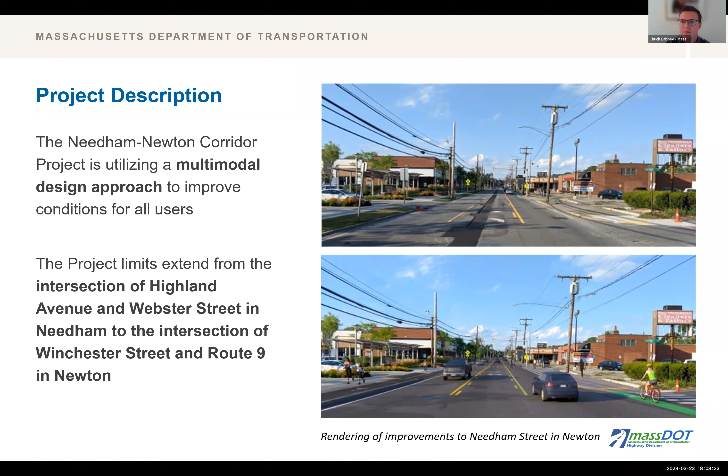Our project goals and benefits: first goal is to improve pedestrian accommodations by providing continuous designated sidewalks and designated crosswalks. Second goal, to provide bicycle accommodations by providing a 5-foot wide raised bike lane with shared use path connections.

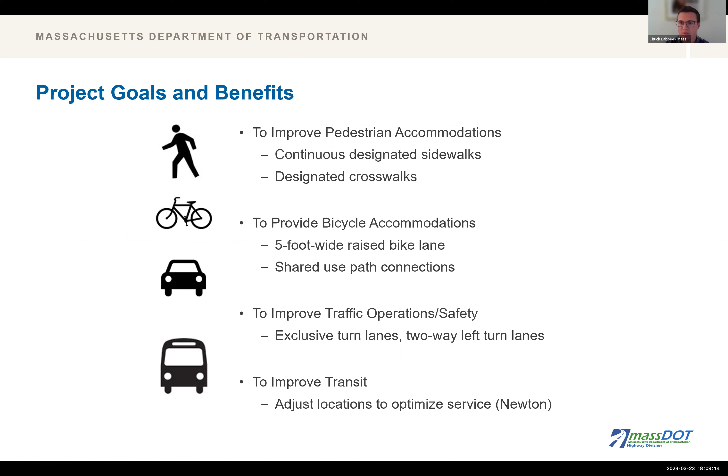Third goal, to improve traffic operations and safety by adding and expanding exclusive turn lanes and two-way left turn lanes. Our fourth goal was to improve transit by adjusting the locations to optimize service.

And now I'd like to introduce Mike Smith from P. Gioioso and Sons, the project contractor, who will discuss how the project will impact road users.

Thanks, Chuck. So as Chuck mentioned, my name is Mike Smith. I'm the project manager for P. Gioioso and Sons. We're the general contractor for this project, and I'm going to run you through all the construction to date and how it all affects everybody.

So our typical work shift is Monday through Friday, 7 a.m. to 3:30 p.m. each day. We do not have lane closures during peak traffic hours, which are 6 a.m. to 9 a.m. and 3 p.m. to 7 p.m. When necessary, night work is typically performed from 9 p.m. to 5 a.m. Sunday through Thursday.

Additional night work for milling, paving operations, and bridge reconstruction will be necessary. Two weeks advance notice will be provided before this work begins. The night work is necessary to lessen the roadway impacts during peak traffic hours. Driveway, pedestrian, and bicycle access will be maintained at all times.

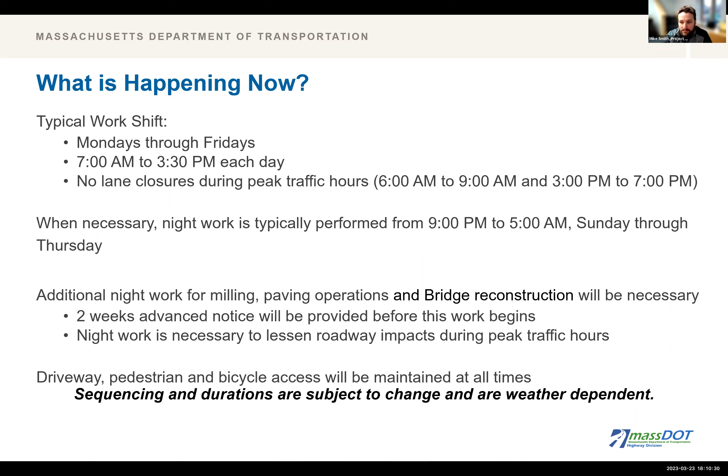Next slide. So the construction progress to date. Next slide.

For utility work, the utility companies continue with the utility relocations, including conduits and poles. 60% of all the overhead and underground utility relocations have been completed to date. The water main requested by the city of Newton is now complete, which included 5,300 feet of 20-inch water main and services. The drainage work throughout the entire corridor is now 100% complete. In the roadway, 5 retaining walls that were necessary to complete the project have been installed, which is about 70% of all the retaining walls for the project.

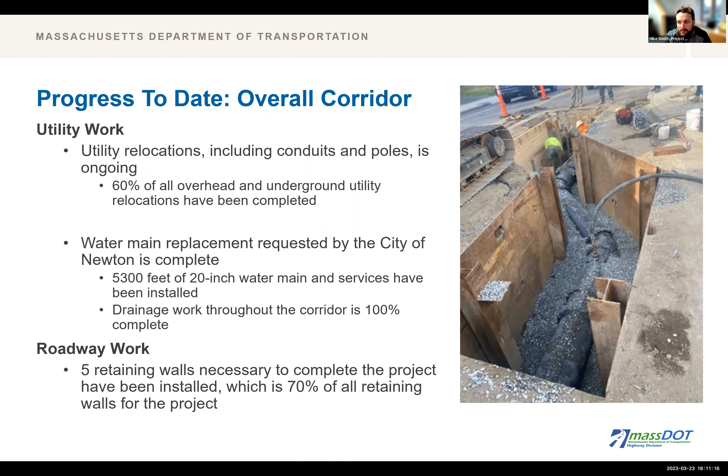Next slide. In Needham, on Highland Ave from Webster to Hunting Road and Gould, the installation of curbs and sidewalks are 99% complete. The traffic signal work is 100% complete, and the drainage work is also 100% complete.

On Highland Ave from Wexford to the bridge over the Charles River, the full depth road reconstruction has been completed, and the first 2 courses of paving have been installed. The traffic signal infrastructure in this stretch is 95% complete, and the drainage work through this stretch is all complete.

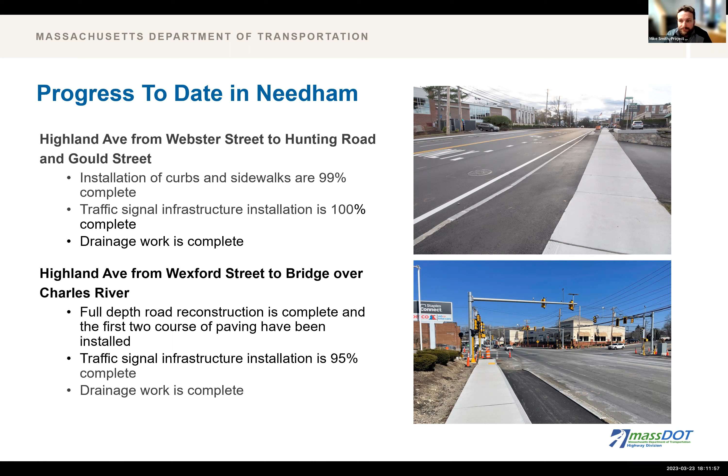Next slide. Moving on to Newton, on Needham Street from Oak Christina down to Route 9, the drainage installation and the water main, as I pointed out, is now complete. The underground traffic signal infrastructure work is about 50% complete.

And at the bridge over the Charles River, the utility duct bank relocations have been completed. The temporary support system is complete. And the phase 1 reconstruction on the east side of the bridge is about 70% complete. Next slide.

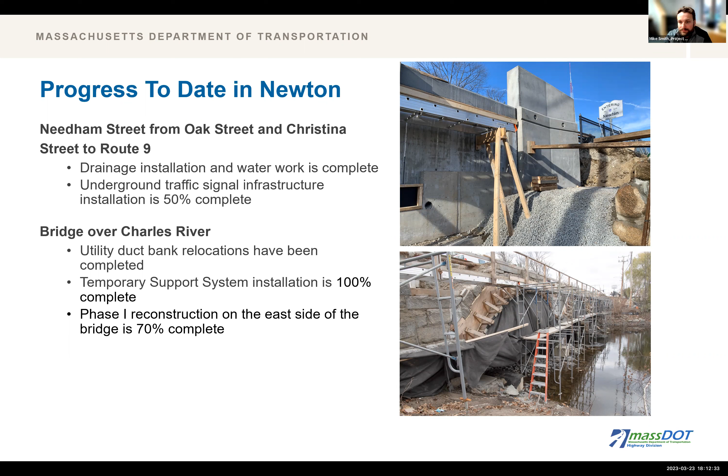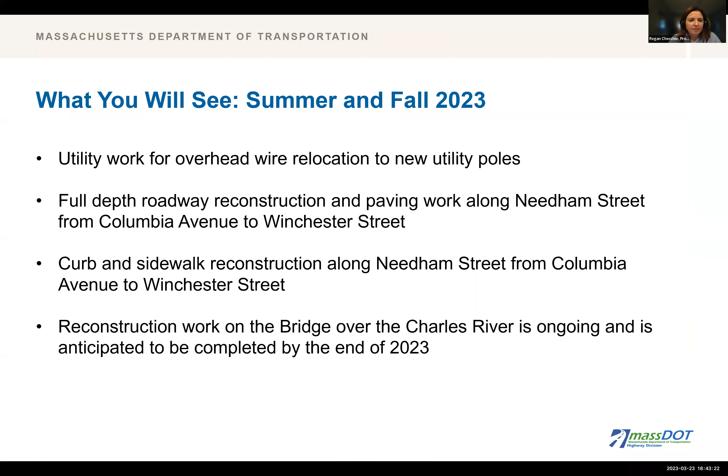So I think the spring work - Mike, I don't know if you want to answer this or if Chuck wants to - it depends on what specific impacts. Our contract's roadway reconstruction is one of the most impactful things we can do, ripping the road out. That is Winchester Street this spring and into the summer, and then proceeding west from that intersection at Wexford and Dedham and Needham, moving down Needham Street. That's the bulk of all our work. As I said, Northland will be trenching the roadway for their utilities in front of their property, so you'll see activity there.

At the same time, you'll see bucket trucks of utilities relocating overhead wires throughout the stretch of Needham Street. So our work at Winchester Street and several hundred feet down Needham Street from the intersection will be this spring, summer, and fall - this construction season. Next construction season, we anticipate completing the roadway reconstruction of Needham Street to Oak and Christina.

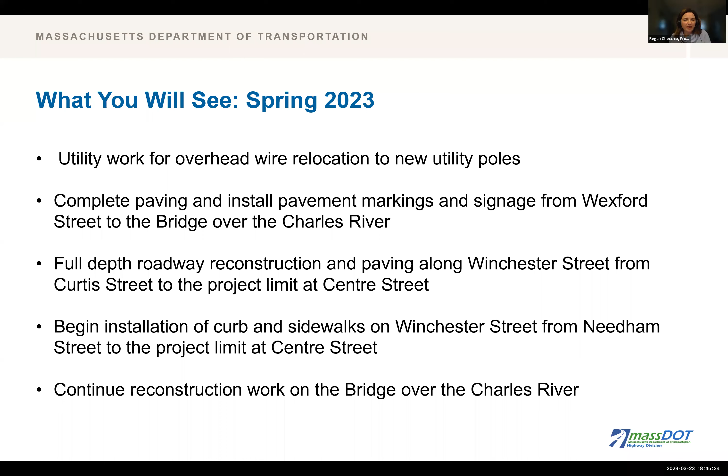Okay, great. Matt, do you mind forwarding the slides? It can go to that final slide with the project contact information as well. I'll note really quick, there's a comment in the Q&A about tree pruning, but I'm not sure what the question is - if the person who submitted that wants to resubmit a full comment or question, it didn't come through. I'll also note that Josh Ostroff from the city of Newton has requested to see renderings for the separated bicycle accommodations at the intersection of Needham and Winchester. I assume we can follow up with Josh separately on this.

Yeah, we have renderings, and tree pruning is right now complete on the entire project. That's one of the first things we get out of the way, so we don't anticipate any more. I'm not saying something might not come up, but there should not be any more pruning on the project. Wonderful, thank you.

There is a question about bus shelter installation - do we know if there's been any progress or movement on that issue? This is from Sean Roach. I do know that's an open discussion between MassDOT and MBTA, and that's outside of this project once complete. I don't know the status of it, but I know it's definitely on their radar - they know it's a need and a want to provide bus shelters once we reestablish the new locations, but it will not be part of this project.